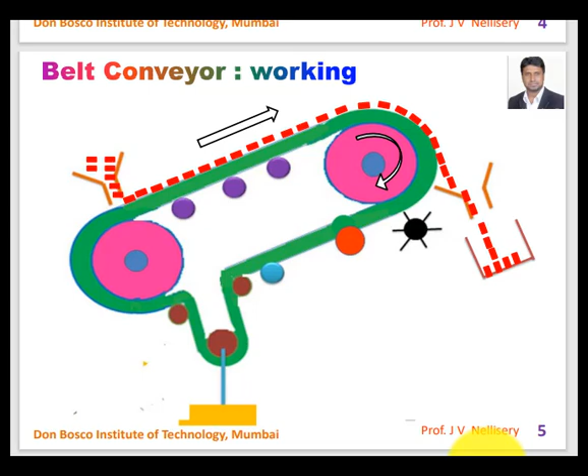At the end point we have the discharge hopper or the unloading hopper. In the unloading hopper, the coal material is loaded and it is stored in the storing vessel. Hence we see the working of the belt conveyor. Let us understand the different parts of the belt conveyor.

Here, as we have seen earlier, the green color is called the belt, that is also called the traction element. The pink color here at the downside is called the tail pulley and is the driven pulley. Here above is called the head pulley, which is pink in color, and it is called the driver as the motor is connected to this pulley. You can see that the pulley is rotating in the clockwise direction. Now we can see that as the pulley rotates, the belt will also rotate along with it.

The orange color thing here is called the loading hopper. The conveyed material is added over the belt. The purple color thing here, as it is seen, is the overrunning idler. There are three overrunning idlers in the picture. As we can see, all of them are in purple color. The overrunning idler supports the belt and the conveyed material so that there is no sag of the belt.

Now as we go further, we can see here a cleaner device. The cleaner device is for cleaning the belt. The red color thing here is the snub pulley. The snub pulley increases the angle of lap of the belt with respect to the head pulley. Hence the slip is reduced. We can also observe here the discharge hopper. Discharge hopper is the place where the materials are unloaded. Hence it is also called the unloading hopper.

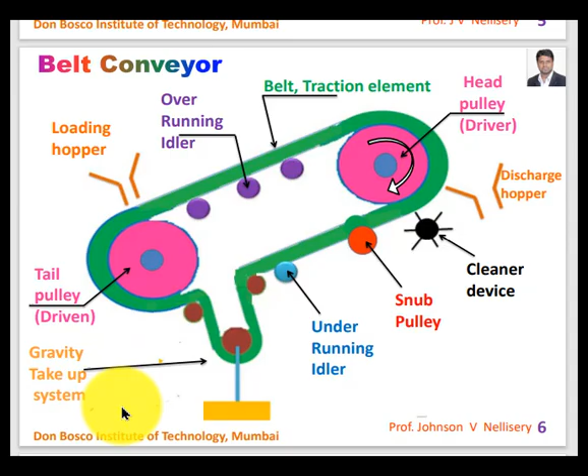Due to continuous working, the belt expands due to creep, and the creep leads to increase in the length of the belt. The increase in the length of the belt leads to loss of tension. This yellow color weight will maintain that tension. Hence, this type of arrangement is called gravity take-up arrangement or gravity take-up system. This is a hand-drawn drawing.

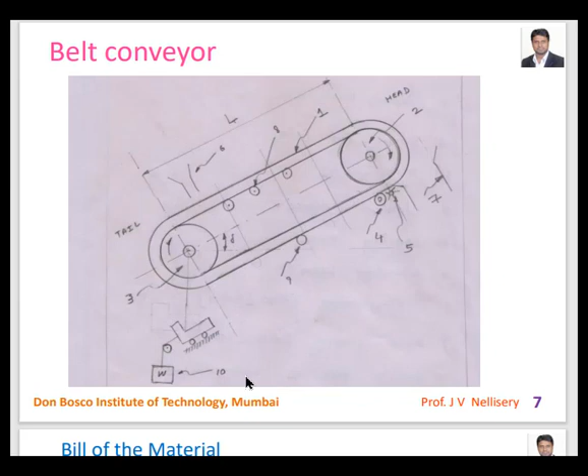Therefore there is a chance that the belt may sag. Hence we require overrunning idler assembly and underrunning idler assembly. Here we can see that the gravity take-up mechanism is shown. Let us look into the important parts of the belt conveyor.

Part number 1 here is the belt, and the belt fabric is made of cotton; 28 ounce, 32 ounce, 36 ounce, 42 ounce, 48 ounce can be the various thicknesses of the belt. The belt thickness depends on the calculations one does. Head pulley is made of cast iron FG20.

Tail pulley is made of cast iron FG20. Snub pulley is made of cast iron FG15. The cleaner device material of construction is as per the manufacturer. The loading hopper is generally made of sheet metal. Unloading hopper is made of sheet metal.

Overrunning idler is made of cast iron FG40. Underrunning idler is made of cast iron FG40. Gravity take-up arrangement consists of a couple of parts, hence its material of construction is as per the manufacturer. Axle of the head and the tail pulley is generally made of C45. These are some of the important parts of the belt conveyor.

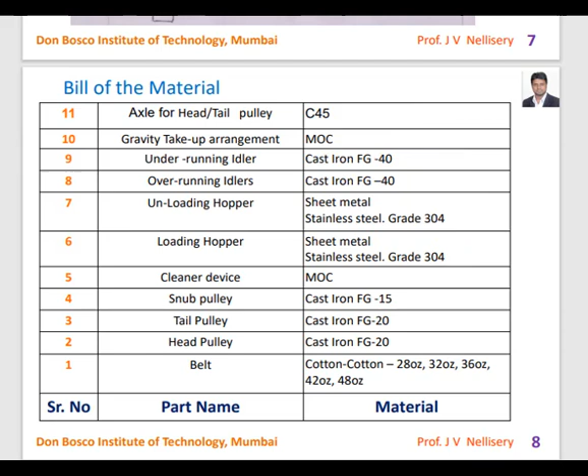Here we see the layout of the belt conveyor. In the layout we can see the front view as well as the top view. Along the front view you can see the loading hopper and the unloading hopper. Here we can also observe a break line. The break line indicates that the belt conveyor is much longer than it is indicated in the figure.

Now we will look into the top view. The belt conveyor requires power to rotate itself. The power is provided by the motor. A brake is coupled to the motor in case you want to stop it. The motor rotates and it is coupled with the gearbox. The gearbox further transmits the power to the axle with the help of the coupling.

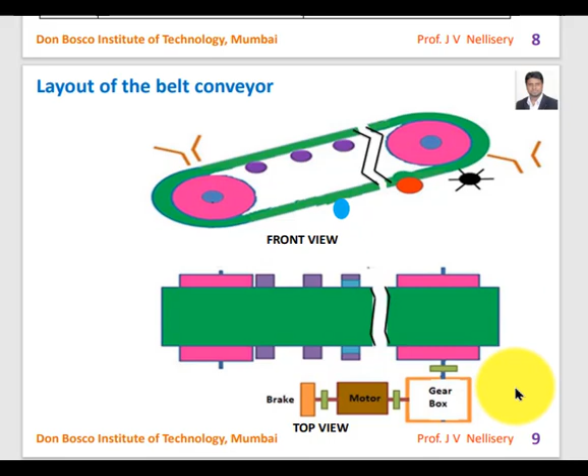When the axle rotates, the pulley rotates, and as the pulley rotates, the belt moves along with it. And when the belt moves, the conveyed material is also transferred from one point to another. This is a layout of the belt conveyor.

In this slide, we can observe the 3D model of the conveyor. Here you can see the tail pulley at the back, and we have the head pulley in the front. The tail pulley and the head pulley are connected to the frame. The frame can also be called the chassis. Here you can observe that the belt is absent so as to understand the internal parts of the belt conveyor.

Here what you can observe is the assembly of the overrunning idler. You can observe here there are 1, 2, 3, 4, 5 and 6 overrunning idler assemblies, and these support the belt and the material to be conveyed from the bottom.

Now when the belt comes along the return run, the belt is supported by the underrunning idlers. Here we have 1, 2, 3, 4, 5, 6 sets of underrunning idler assemblies, and they support the belt. So this particular slide helps us to get the idea how the belts are supported above and below.

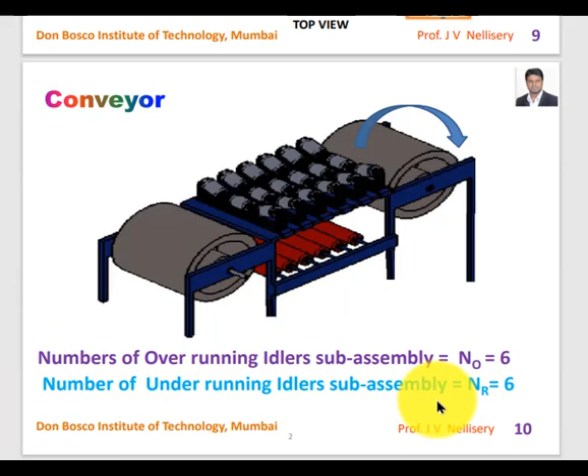The number of overrunning idler sub-assemblies in this particular model, we can see it as NO is equal to 6. Similarly, we can observe that the number of underrunning idler sub-assemblies in the model NR is equal to 6.

Types of conveyors. Here we can see in the figure the inclined or take up or convey up system. In the conveyor, when the loading hopper is at this particular location and the unloading hopper in this particular location, and the conveyed material is being taken from the bottom to the top in an inclined manner, this type of system is called a convey up system.

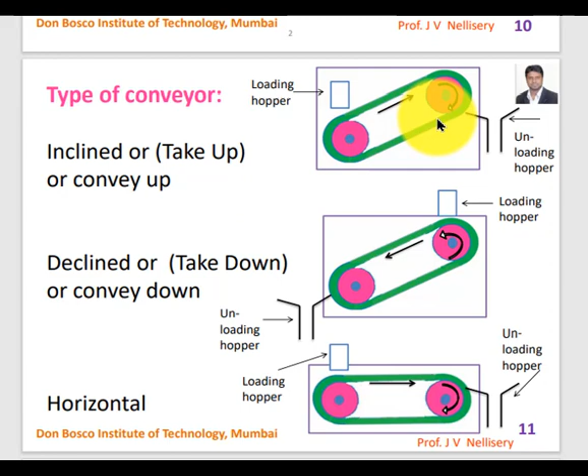Let us look into the declined or take down or convey down system. In a convey down system, the material is loaded from the loading hopper at the top and it is carried with the help of the belt to the bottom, and at the bottom side it is unloaded in the unloading hopper. When the material is conveyed from the top to bottom, this type of conveyor system is called a convey down system.

Let us look into the horizontal conveyor. In the horizontal conveyor, you can observe that on one side we have the loading hopper and on the other side we have the unloading hopper, and the material is conveyed from one point to another point. Here there is no inclination of the belt. Hence we can say that this is a horizontal type of conveyor.

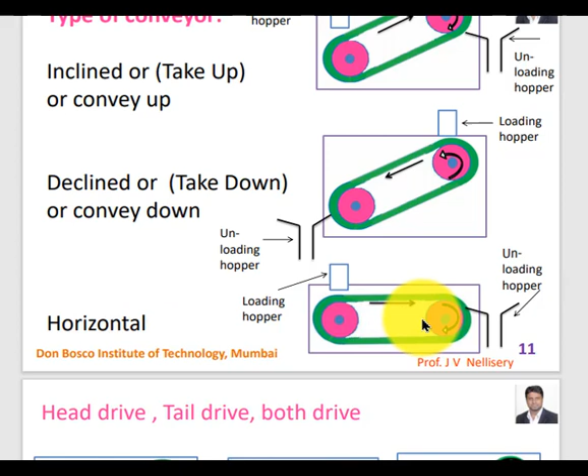When we design the belt conveyor, it is very important to locate the motor. The motor can be located at the head pulley, or it can be located at the tail pulley, or it can be located at both the pulleys. So the designer has to take the final call.

When the motor is located at the head pulley, a direction symbol is given at the head pulley. Such a condition is called head drive. When the motor is connected to the tail pulley, in that case, a directional mark is given at the tail pulley.

In this condition, we can understand it is a tail drive system where the motor is connected to the tail pulley. In both drive system, motors will be present at the tail pulley as well as at the head pulley. Hence, you can see the directional marks at both the sides. This type of system is called as a both drive system.

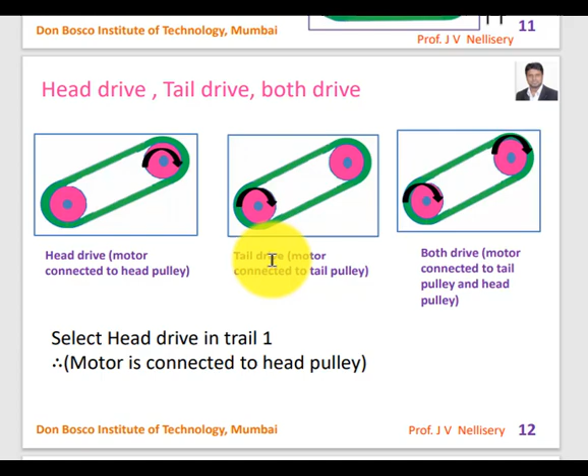For initial calculations, we'll consider the motor to be connected at the head pulley and carry out the calculations. If the head pulley motor is not able to provide sufficient torque and speed, in that case we will put one more motor at the tail pulley. So let us start with the head drive calculations. Generally, we will put a motor at the tail pulley only when there is no space at the upper side for the motor to be located. In that particular case, generally the motor is connected at the tail pulley.

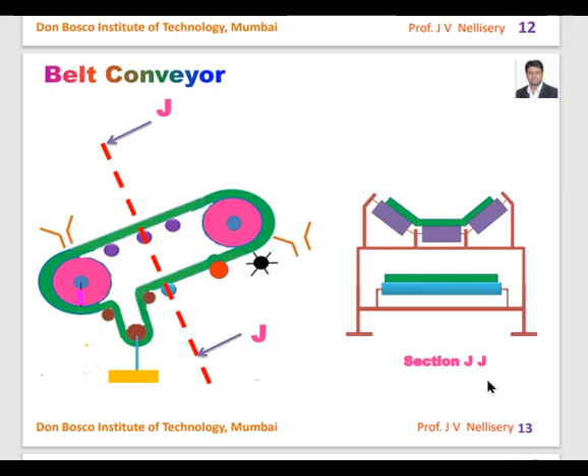Similarly, the sky blue color here is the underrunning straight idler, which is represented by a single idler at the bottom. The sectional view JJ helps us to understand a more detailed view of this particular section. Here we can see the enlarged picture of the section JJ. The brown color thing, what you can see here, is the frame or the chassis for the overrunning idler and the underrunning idler. Here the green color thing, what you see at the top, is the belt conveyor during the upper stroke, and the belt conveyor here at the downward stroke or the return stroke. The center is located with the central idler, and to the left we have another end idler, and to the right the other end idler.

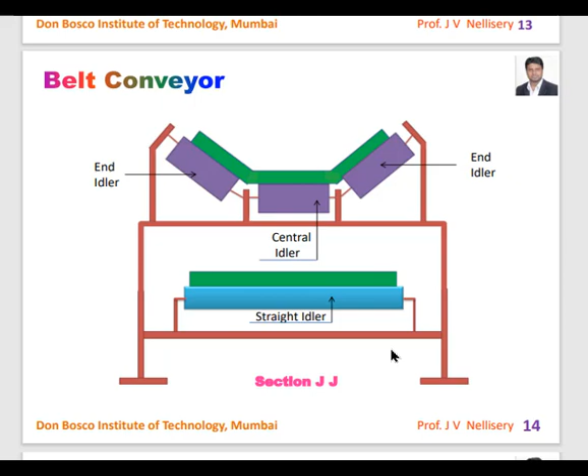One can observe that there is straight idler at the bottom, and this is how the section JJ in detail can be understood. We can observe here that section JJ has three cases. In all the three cases, the underrunning straight idler has only one single straight idler in case 1, case 2 and case 3, while in the overrunning type the number of idlers are changing from case 1 to case 3. Let us understand them. In the case 1, overrunning straight idler consists of only one single idler. This is the configuration of case 1.

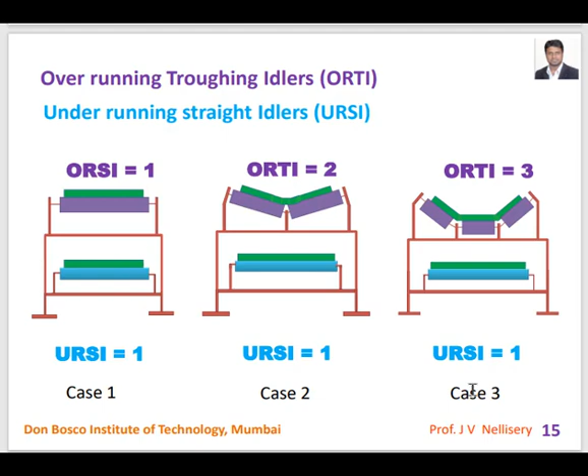In case 2, the overrunning troughing idler has two inclined idlers which make a troughing angle. The troughing angle helps in balancing and securing the load that it is carrying from one point to another point without the load being fallen off. In case 3, we have three idlers which make a troughing angle and which makes the conveyed load to be more safe. It avoids falling off of the conveyed material. Hence, this type of configuration we call it overrunning troughing idler 3. Hence, in this particular design, we will be considering case 3 as the orientation for the JJ section.

Some of the important parts and the sub-assemblies of the belt conveyor are as follows: belt traction element, driver head pulley sub-assembly, driven tail pulley sub-assembly, overrunning idler sub-assembly, underrunning idler sub-assembly, loading hopper, unloading hopper, snub pulley, cleaner device, and gravity take-up arrangement.

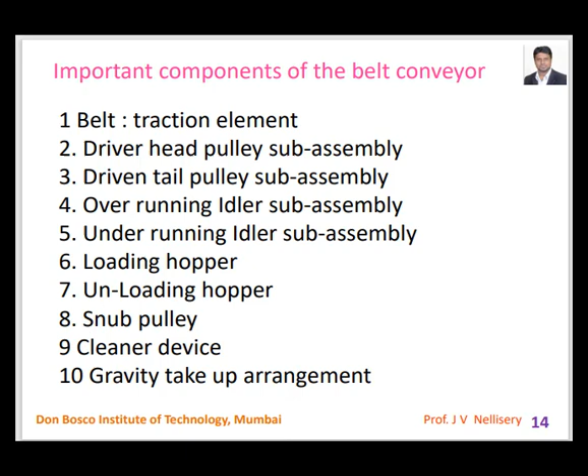In case of underrunning idler sub-assembly, we need to design single idler because that is the configuration we have selected: axle, bearing and frame. And we need to take care of the motor and the transmission selection, as well as some accessories as well, as we have seen earlier. So these are some of the components in the belt conveyor.